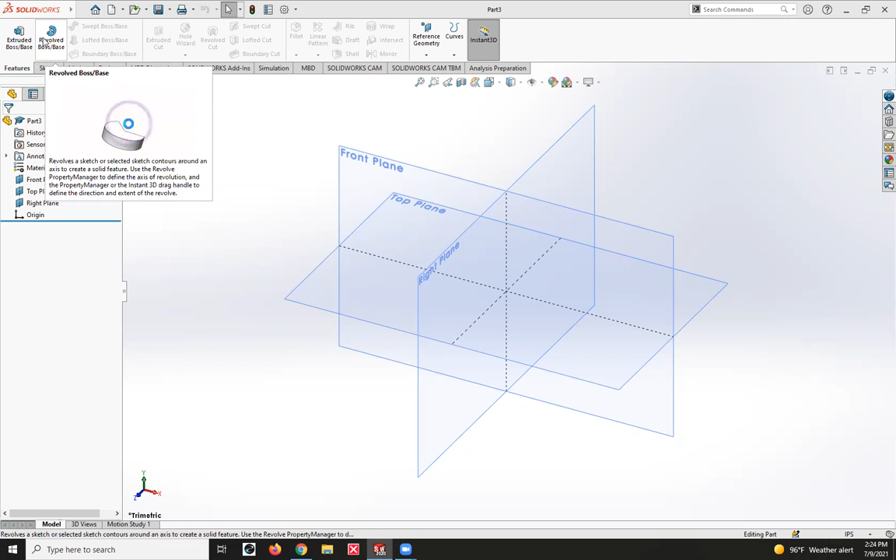This is very helpful for parts that are symmetrical about some sort of axis, something like a cup, a water bottle, a nail, something round, some sort of pillar. This tool makes it very easy, whereas you don't have to extrude a cylinder and then cut away at it, but you can just create the simple shape from the beginning and revolve it around.

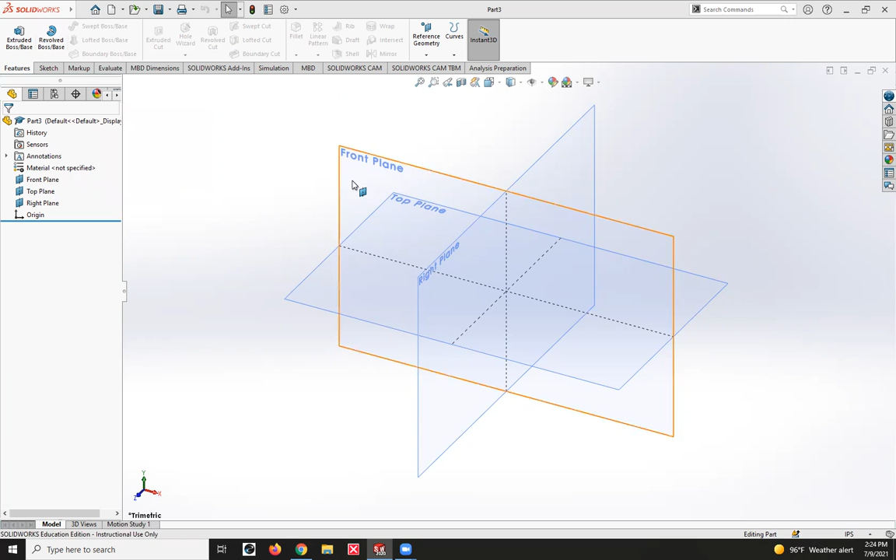Just like with extrudes, you need to start with a 2D sketch. I'll sketch here on the front plane, and it doesn't really matter what I sketch. I'm just going to do some simple shape here, and we'll call it good.

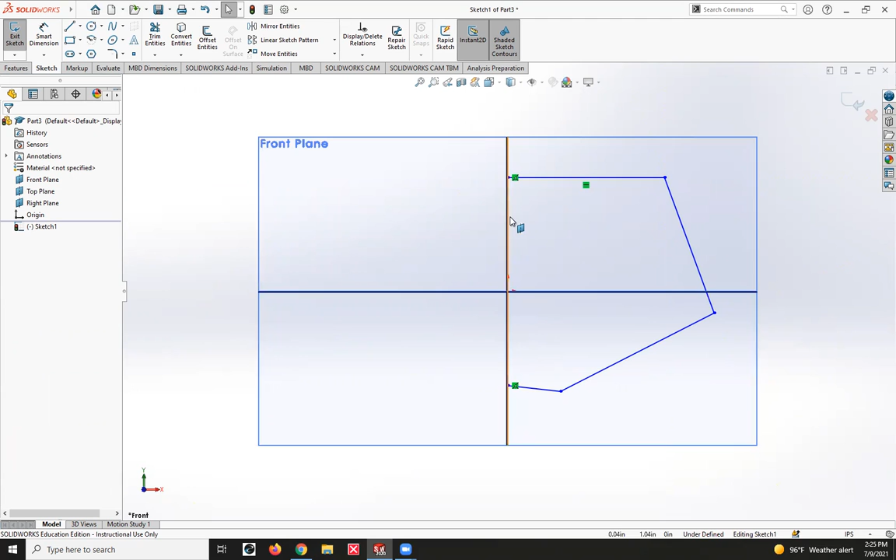Just like with extrudes, you do need to have a closed loop. If I don't have this closed loop, it won't allow me to create the revolve I want. Well, I can do a thin feature revolve where I select one of these lines as an axis for the revolution, but you'll notice it's not a solid piece because I didn't have a closed loop.

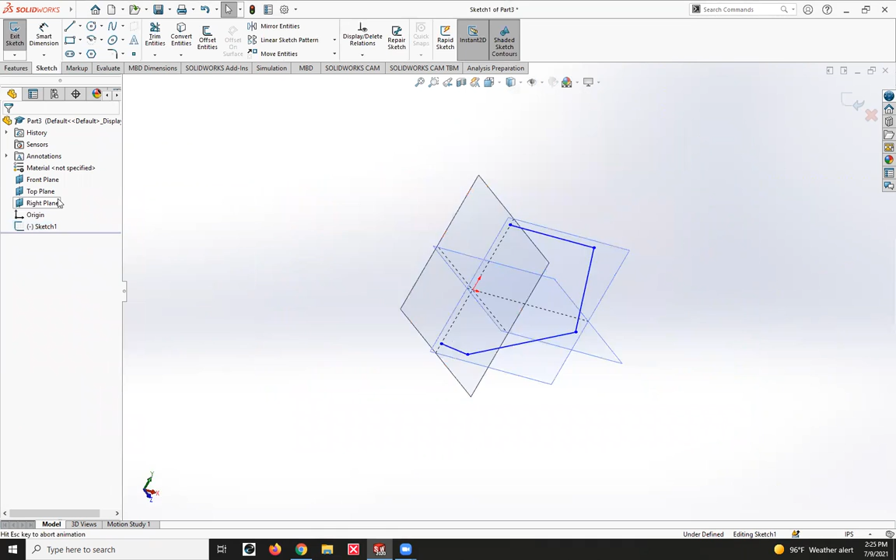I'm just going to get rid of that and come back to this sketch to show you what I mean. You need to create a closed loop, so I'll do that by closing these off. Now you'll notice it's shaded gray like you saw with the extrudes. Now we've got a closed loop, and now we can do a revolve.

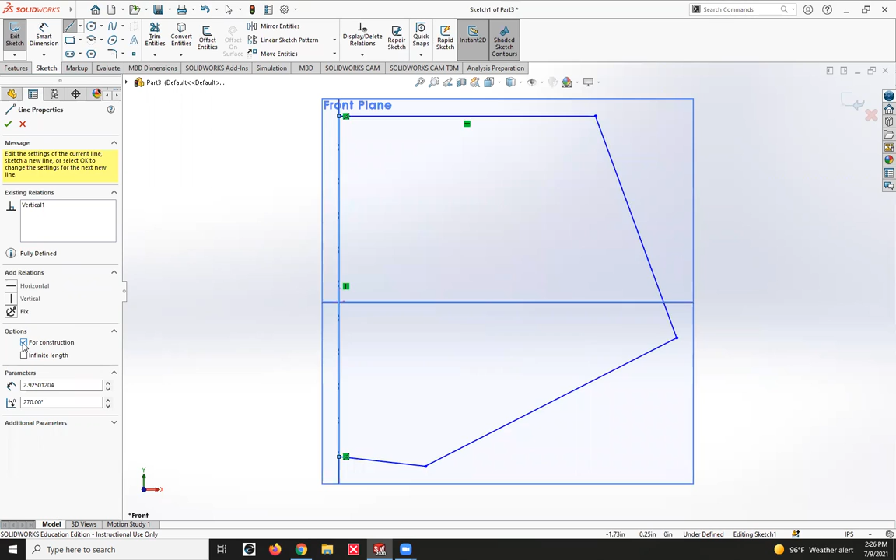One thing I will say: some people make the mistake of turning that center line into a construction line. You'll notice that when I do that, it's not a closed loop anymore, so it doesn't allow you to do the revolve. You need to have all these not be construction lines; you need some sort of closed off shape so you can make the revolved part.

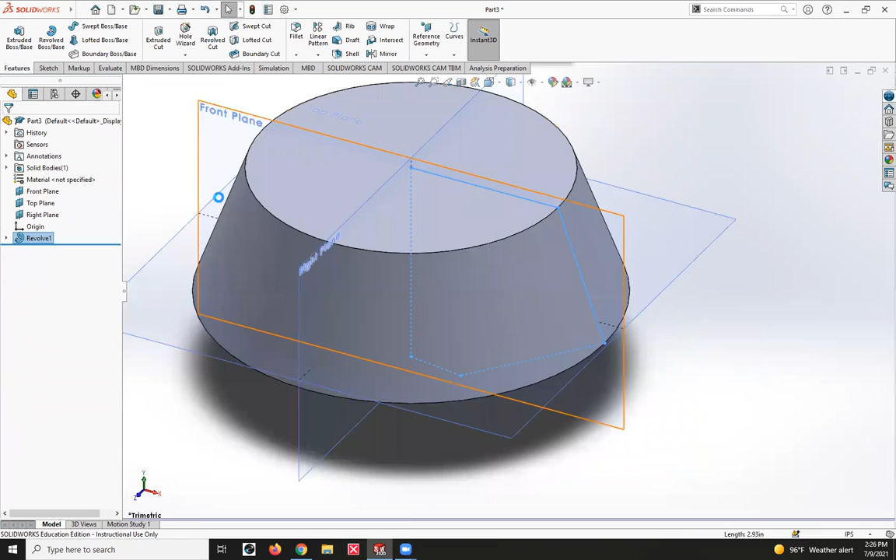So I'll finish this sketch here and exit it. Then I can do my revolve, right next to the extrude tool. You select an axis, whichever one you want—I wanted that center axis—and it does all the work for me. All I have to do is select that and we're done. It created that shape by revolving the original sketch.

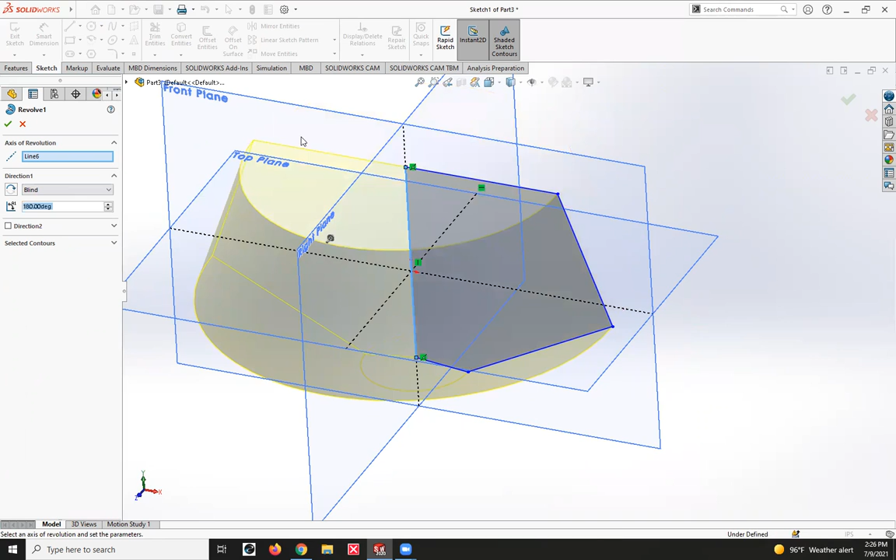You can see the blue dotted lines where that original sketch was. If I come back in here to edit it, I'll show you a few things you can do to change this revolve. For example, if I didn't want it to go 360 degrees, but only 180, I can change that degree measure, and now it's going from that sketch plane around 180 degrees. You can also make it go the other direction.

You can use these different options just like with extrudes—go up to a surface, offset from a surface, up to a vertex. But I'll say you're probably just going to live here in the blind revolve, especially for most of the things you do in our class.

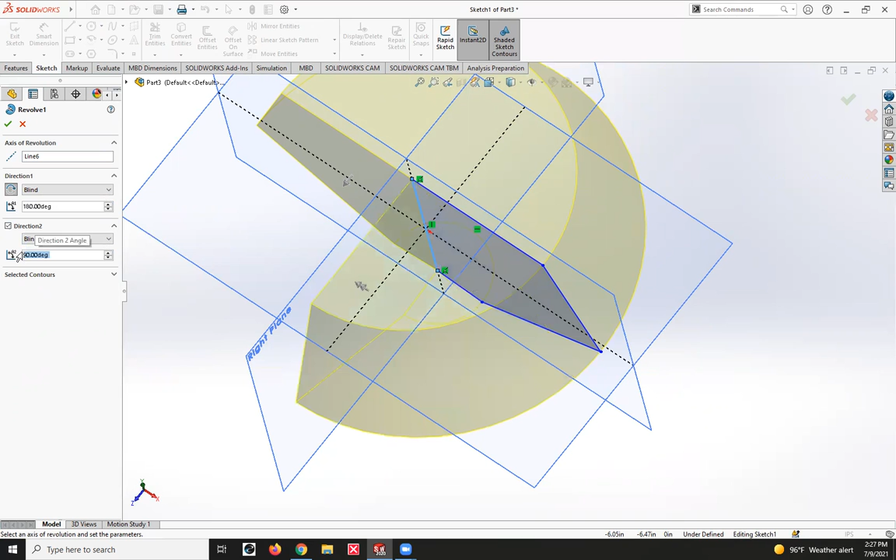You also have the option to do two directions. So right here we've got it going 180 degrees this way. Let's say I want it to go like a 3/4 circle. I select that second direction and type in 90 degrees, and now you'll notice it goes 180 one way and 90 the other way.

Let's say I want to change the direction there—I can do that, and then hit OK. Now we've got that 3/4 circle shape I was talking about. So those are some things you can do.

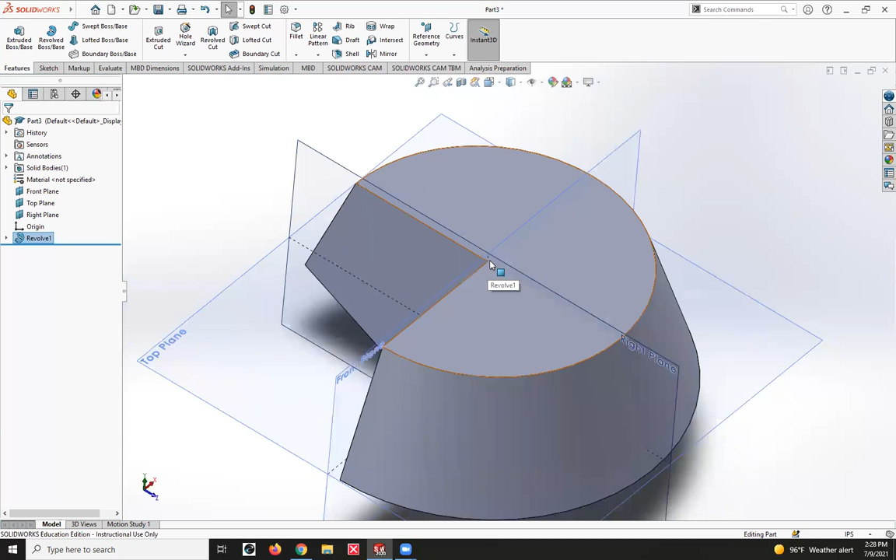Another useful thing is knowing how to insert an axis, and I'll show you why in just a moment. If I wanted to create some sort of hole through the middle of this, I could do an extrude cut through the middle like we showed in previous videos, but to save time, I can just include it all in that original sketch.

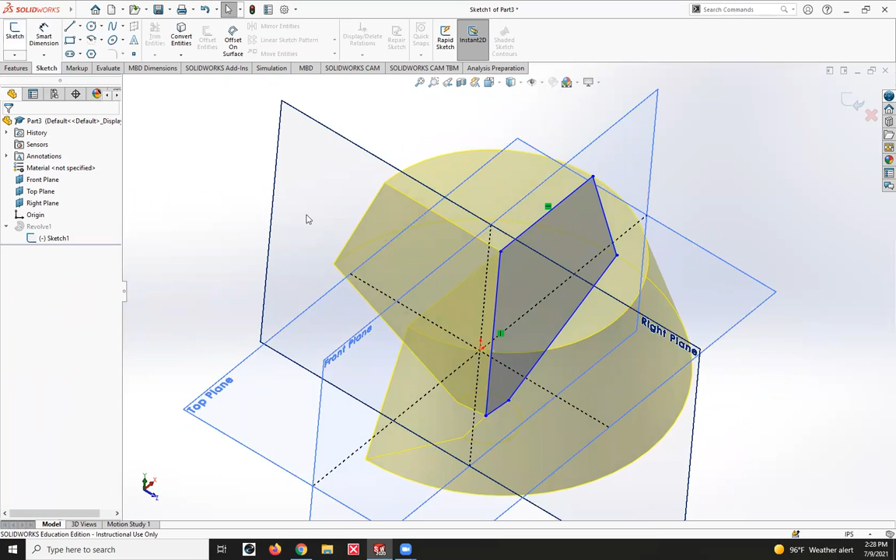I'll do that by editing my sketch here. What I'll do is delete these relations and pull it off of that center line. Now you'll notice it doesn't put a hole in there quite yet, and that's because the revolve is still using that line as the center of our feature.

What I want to do is create some sort of axis that goes right here where these planes meet and revolve around that. If it doesn't quite make sense, it will here in a second. So I can use this reference geometry—there will be a whole video on reference geometry under Lab 5—but for now I'll just show you how to input an axis.

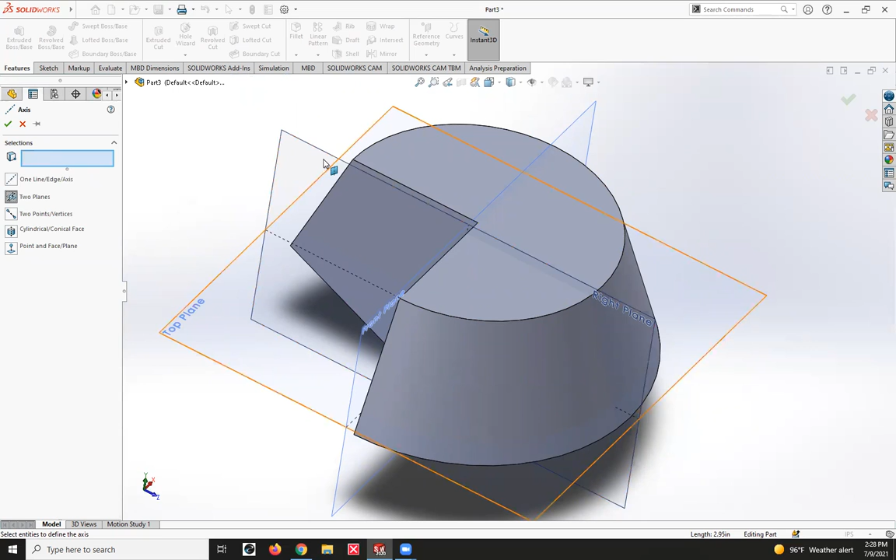Hit it, come down to axis, and you can select two planes. Select this one and this one right here. You'll notice where those planes meet, it inputs an axis right there. That axis can be used as an axis of revolution, so let me go put it above my revolve so I can use it.

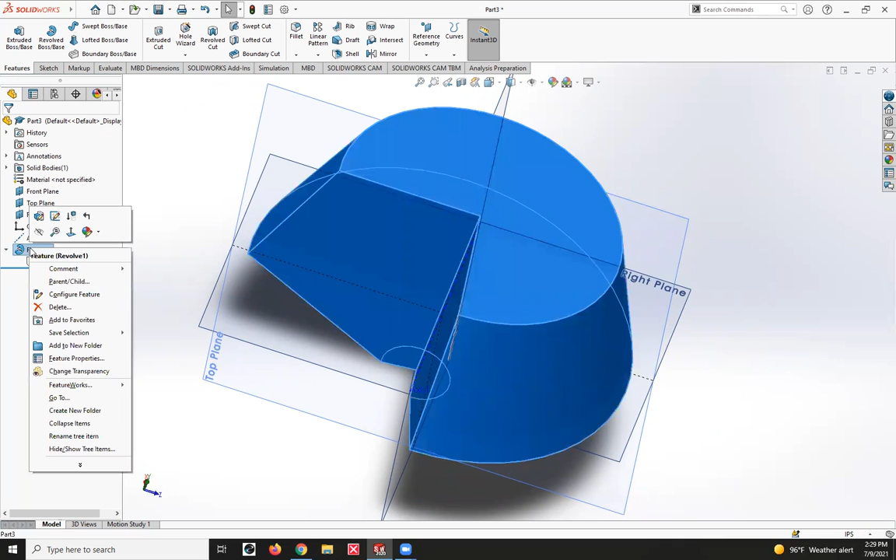I can edit my revolve feature, and instead of using line 6 on our sketch, I can just delete that. Here I can actually select the axis, and now you'll notice there's a hole going through it.

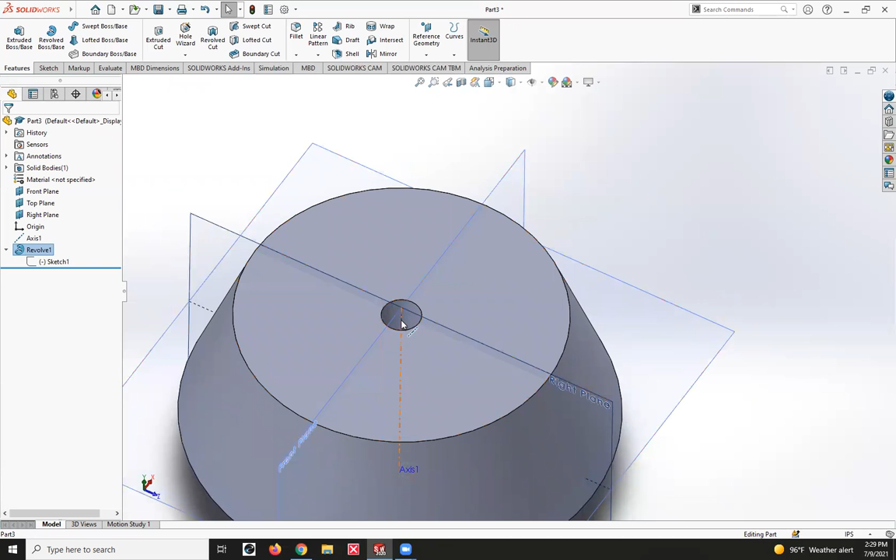I'll make this 360 degrees again. Now you'll notice because the sketch was pulled off to the side and we revolved around the very center, it creates a hole through the middle of our part. So again, those are some basic things you can do with revolves.

In the next video, we'll show you how to use Revolve Cut. Super simple, very similar to doing the revolve feature, and you can get some really cool shapes with it. So thank you.